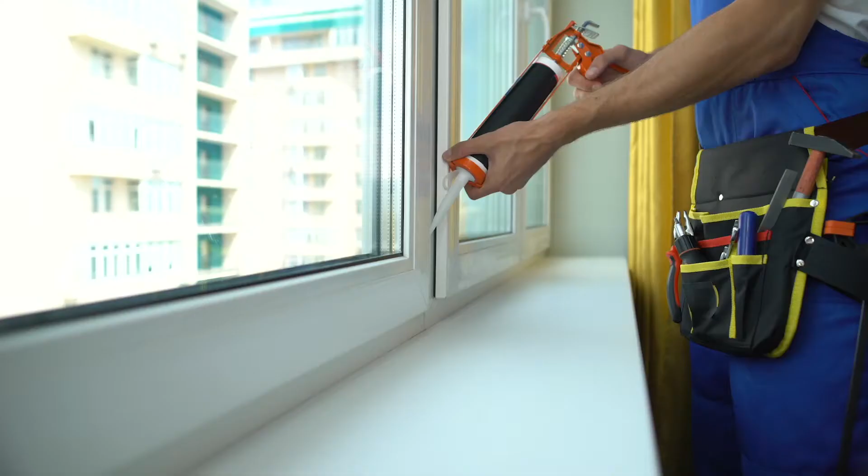I'm Peter Yost of BuildingWright, and today I will show you real-world examples and specifics in how the new code draws relationships between moisture management, air sealing, and insulation. I will talk about other ways to assess air leakage, some specialized air sealing materials, and of course, that sticky stuff.

When air leaks into or out of a building, there is a double penalty: the energy inefficiency of conditioned air being lost, as well as the moisture moving with that leaking air. If that leaking air hits a cold surface inside our walls or roof, the resulting water is likely hidden, creating problems we can't even see. And air leakage is really sneaky. It takes true attention to detail to beat it.

The code has a new focus on air tightness. We have new materials and tools to better manage air leakage as well. We have new materials such as liquid flashing. Infrared cameras reveal patterns of heat loss, such as in this image of a timber frame cathedral ceiling. The streaking or blurring is not a poorly focused image, but reveals the air leakage in the roof assembly.

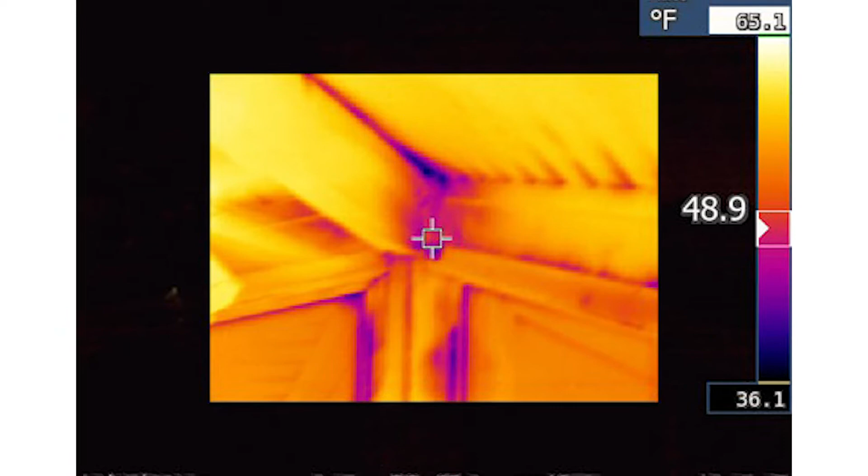And perhaps most importantly for air leakage, the blower door measures the air tightness of a home, a test that the new code now requires. When we air seal a building, we need to connect a whole bunch of different materials together to get continuity. You can see that this idea of continuity is built right into the code, starting with the definition of air barrier. Remember, we are using the terms barrier and control layers interchangeably.

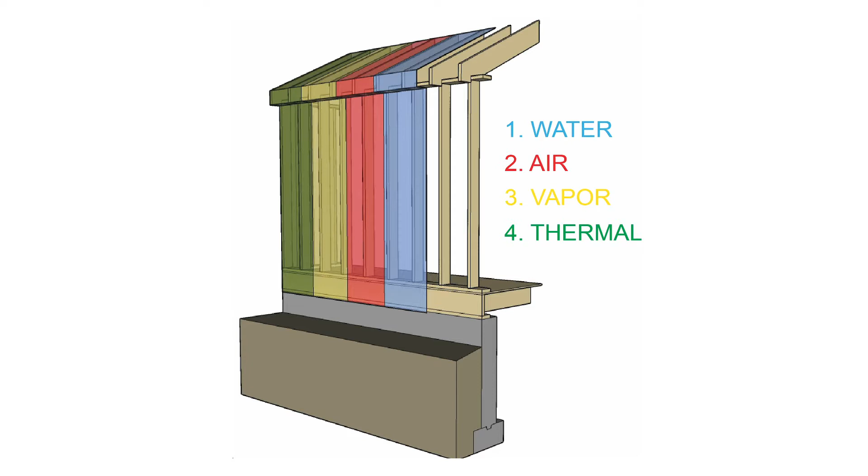We are going to need real focus to connect all the materials to get the building airtight. This image is conceptual and does not show the details of each layer, but it represents how we need to think of control layers as continuous and prioritized, with air being number 2.

The building code does not actually define what air impermeable means, except in its definition of air impermeable insulation. Air impermeable insulation is defined as having air permeance less than or equal to 1/50th of a liter of air getting through 1 square meter of material in 1 second at a pressure of 75 pascals, which is about the same as a 35 mile per hour wind. Well, that's a complicated expression, but it means air tightness is pretty tight.

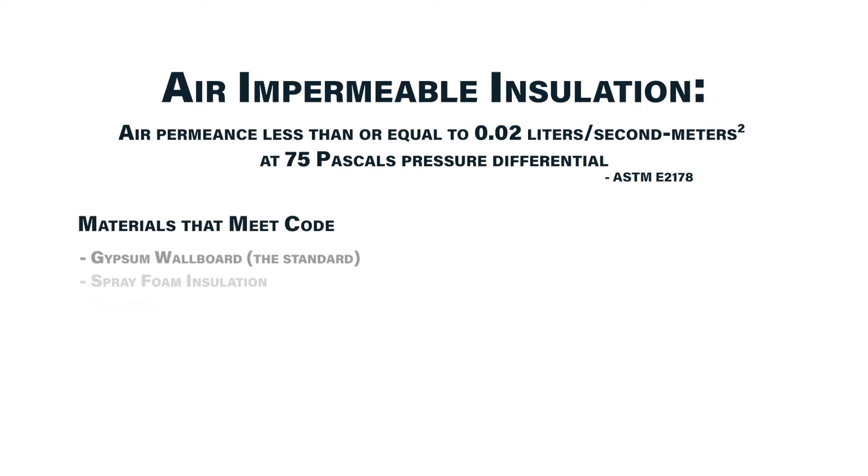But it really means that you can't start your air control layer with a field material that does not meet this ASTM standard, as determined by a third-party independent certified lab. All the materials on the left qualify as air impermeable, starting with drywall, the actual material they chose as the threshold material. Most building professionals are surprised to see that cellulose insulation is not considered air impermeable.

It does not mean that cellulose is not significantly more airtight than fiberglass. Cellulose is many more times airtight than fiberglass insulation. It's just that cellulose by itself is not nearly airtight enough to count as your field air sealing material.

One way to think about this idea of continuity is the pen test. You take your finger or your cursor or a pencil, and without lifting it off the page, trace the control layer from the footing to the ridge in a building cross-section. It's going to be really tempting to jump at changes in assembly, changes in materials, changes in plane. More on this later. Yes, that air leakage can be sneaky.

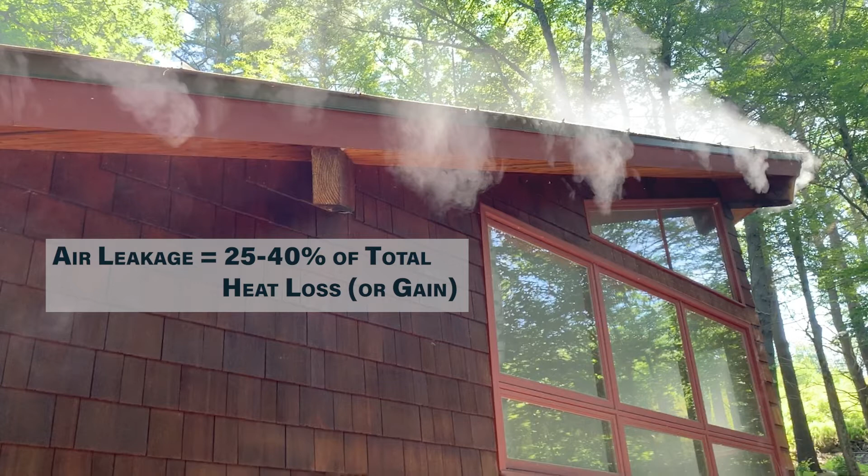This home had a ceiling roof moisture problem even after the roof was re-insulated and air sealed. Using a blower door to pressurize the house along with a theatrical fogger, you can see the air leakage at the ridge around the ridge beam that extends from inside to outside the building, as well as at the V-groove deck boards, also moving from inside to outside the building. This just goes to show that if you don't do it right the first time, it can be really challenging to address later.

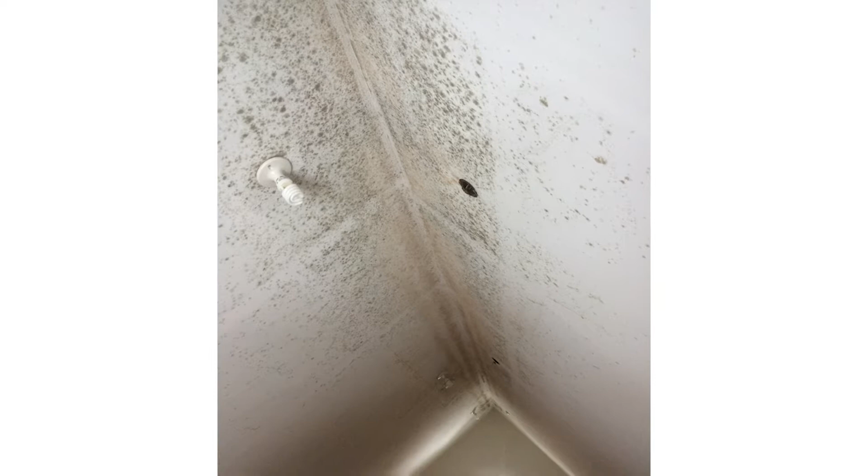Sometimes the air leakage moisture problem is obvious and unhidden, like in this picture of a finished attic. But it turns out that this is in a co-housing community, so there are about 30 very similar finished attics, some looking perfectly fine. Could the problem be hidden behind the drywall?

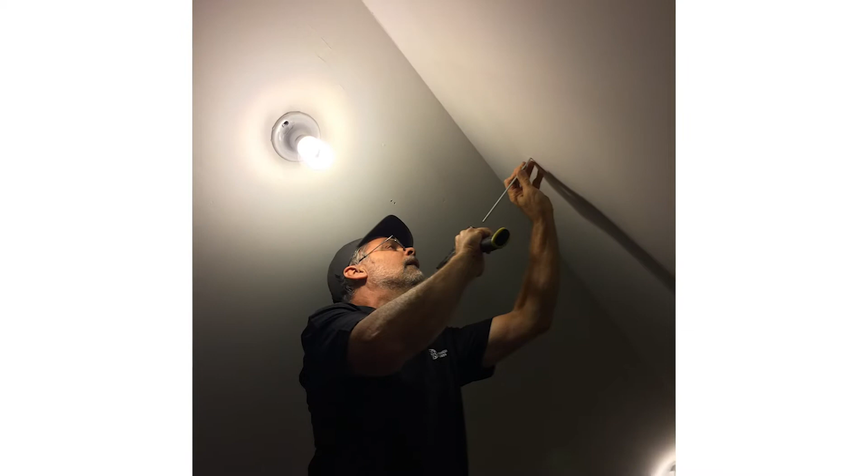To find out, I used long pins to penetrate all the way to the underside of the roof sheathing. I connected the pins to my moisture meter to measure the moisture content of the roof sheathing, leaving only 2 tiny holes to patch. Here is the moisture reading with the pins pushed all the way up to and slightly into the underside of the roof sheathing. Whoa, moisture content of nearly 40%. That is literally wet.

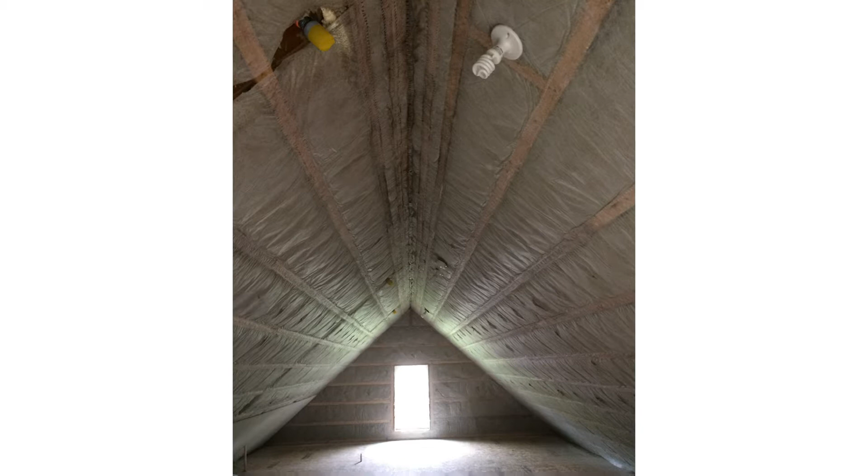So we tore down the drywall to find mold on the upper 1x3 strapping. When we took down the strapping and the cavity insulation, we found plenty of moisture staining near the top of the rafters and up to the ridge. We luckily caught all this before there was any structural damage to the roof framing or sheathing.

The source of this hidden moisture? Air leakage at every ceiling penetration that wasn't sealed, mostly fire sprinkler heads and light fixtures. So sometimes the moisture problem can be seen, but more often than not, air leakage results in hidden moisture damage. Sometimes we're not so lucky.

The air leakage and subsequent hidden condensation here has just started to rot out the top of the lower gambrel steep pitch and also the rafter for the top pitch just above that. This had to be repaired with structural plywood gussets to support the pitch change joint. This home was about 4 years old.

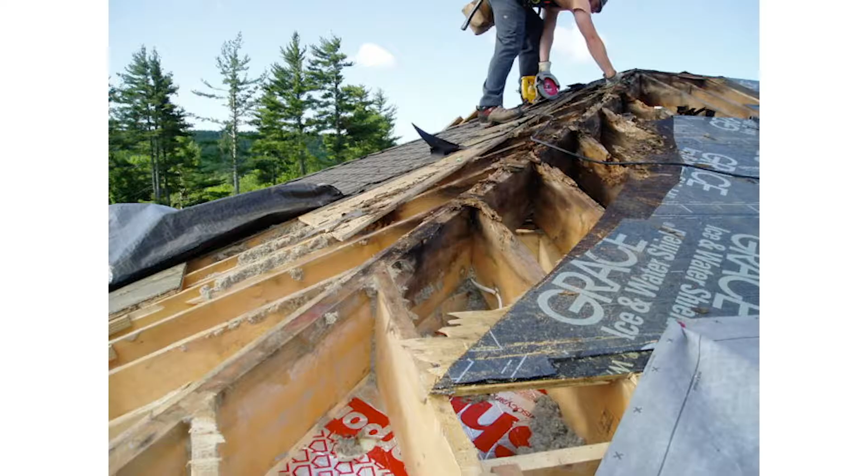Here is an unvented hip roof with air leakage trouble. The rotted roof sheathing required complete replacement. With the support of a structural engineer, we were able to repair the top half of the hip rafter and the ends of the rafters at the hip. This house was about 10 years old. The thing is, both these homes were built after 1990 and were considered tight homes. Even seemingly small air leaks can cause big trouble.

So, where do we locate your continuous air control layer? You have three options, of course: continuous on the interior, in the framing cavity, or on the exterior. The most common approach on the interior is usually referred to as the airtight drywall approach, or ADA. You seal the margins of each drywall panel and margins of any penetrations or cutouts to each panel with a sealant or caulk. The sealant bead must be continuous to get a complete air seal.

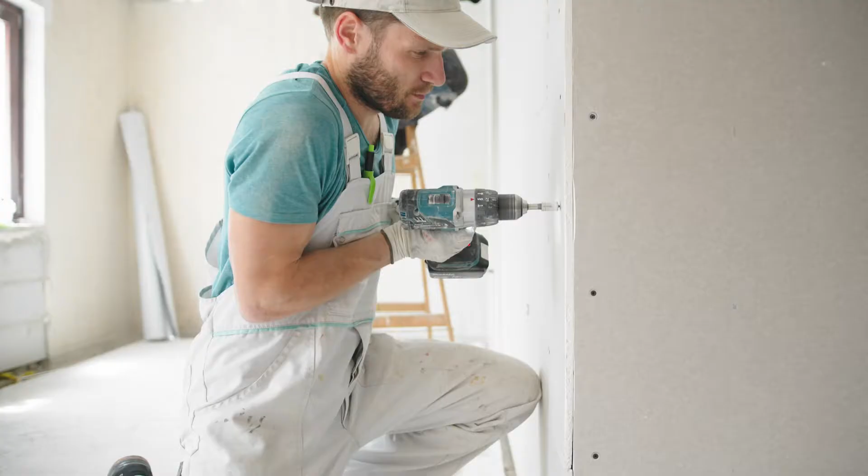In the airtight drywall approach, or ADA, the continuous air seal material behind the drywall could be a gasket. But note that whenever you use the ADA, you might be counting on your drywall trade to get the air seal continuous. There will be some training and quality control required no matter who hangs your drywall with the ADA system.

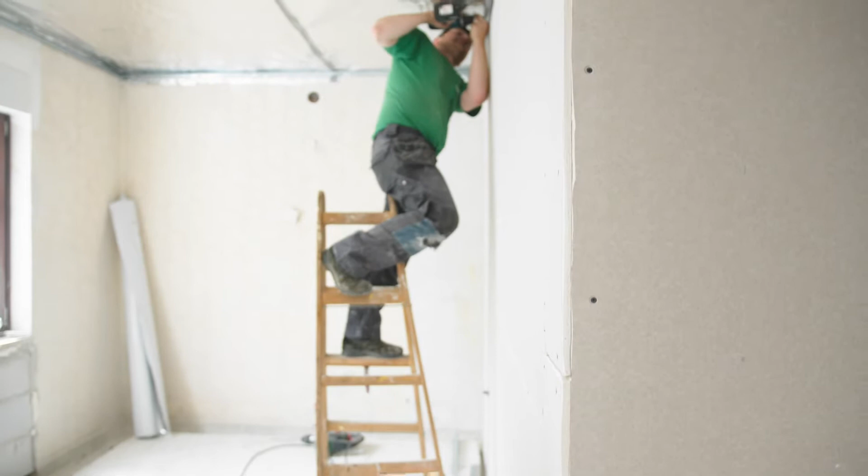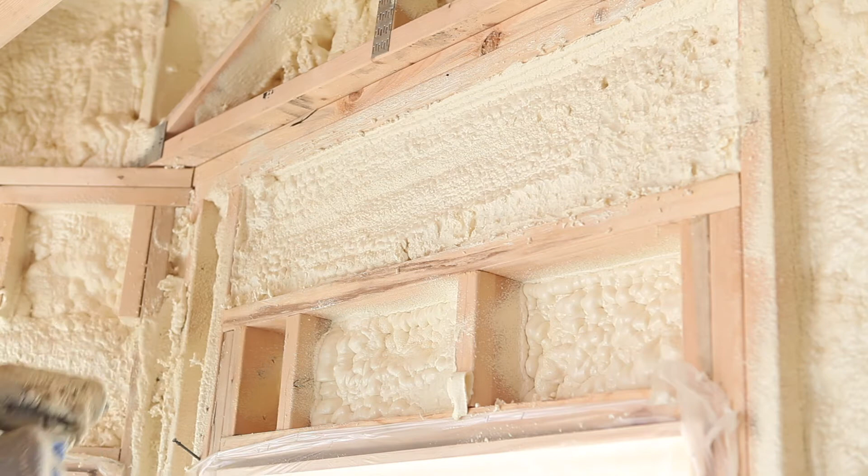Next up is to get your air seal in your framing cavity, almost always with some sort of air impermeable spray foam insulation, acting as both your air seal and your insulation. We will be talking about spray foam later in this video and again in the insulation video, but in any case, if spray foam insulation is to be counted on for a continuous air control layer, care must be taken to individually air seal any place where air can leak that is not in the framing cavity, like between double top plates.

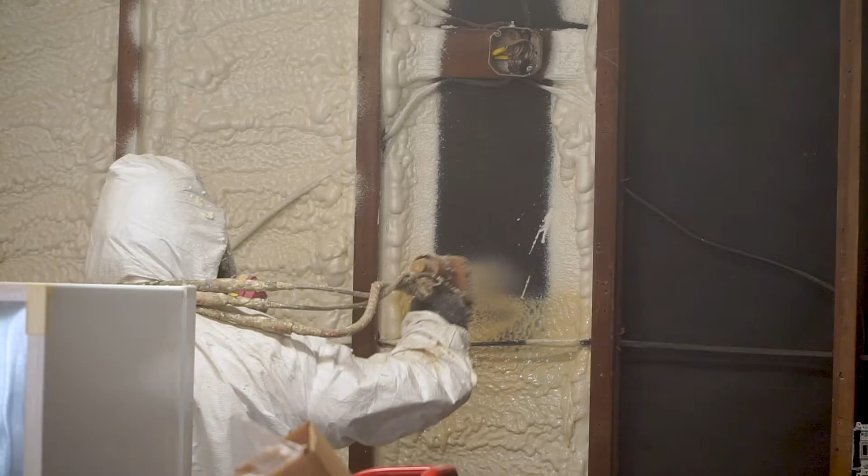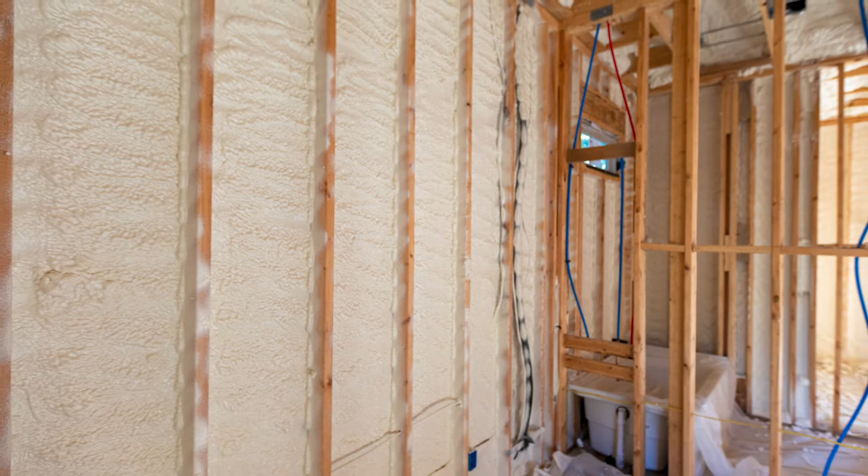Here is open cell spray foam as both cavity fill insulation and air control layer in a foundation wall. Here is closed cell spray foam in a roof assembly and closed cell spray foam in a wall cavity. Now note that the two closed cell spray foam applications do not fill the framing cavity. These cavities have been flashed with the spray foam as the air control layer, but the full complement of insulation will be completed with an air permeable cavity insulation. We will come back to this flash and fill or flash and batt approach in the next section on insulation.

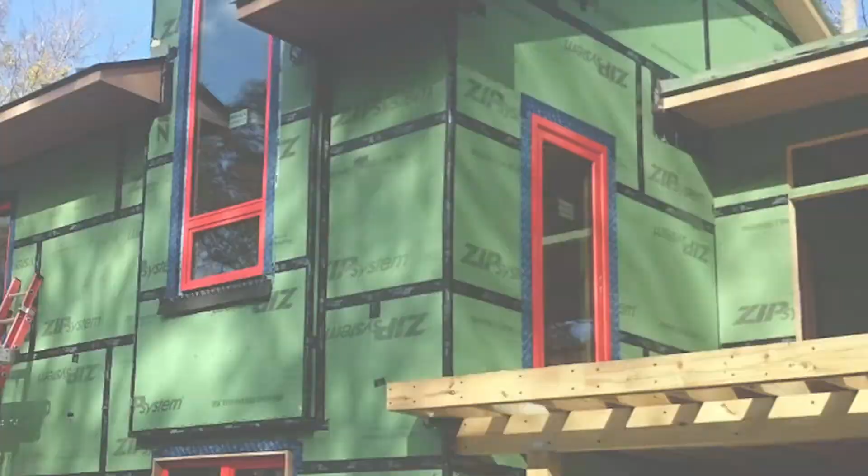The final option for the location of the air control layer is the exterior. The air control layer can be the sheathing or a flexible sheet good like house wrap, or even liquid applied membrane, either applied to the exterior sheathing. One example of sheathing as the air control layer is the Huber ZIP System, where the tape completes the air control layer because the sheathing panel meets the air impermeable code standard. A major advantage of a continuous exterior air control layer is the lack of interfering assemblies, like floor systems and interior partitions.

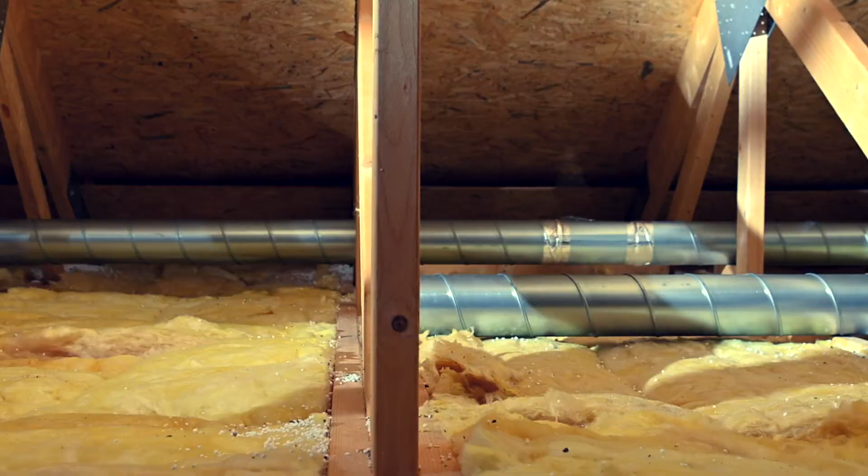But wait, why a photo showing gypsum wallboard as part of an exterior air control layer? Well, if your attic is vented and your insulation is at the ceiling plane, then that is where the air control layer has to be, at the ceiling. So while the drywall is definitely inside the building in terms of bulk water management, the attic is technically outside of conditioned space or where the air control layer is.

Now, the cool thing about how they drywalled this top floor ceiling is that they came and drywalled this ceiling separately and before any other drywall work was done, and before any top floor interior partitions were framed and installed. That means the air control layer at this ceiling is really continuous. No penetrations or cutting around interior framing. Sometimes better performance requires thinking outside the box a bit.

While the field of any exterior wall is pretty easy to get airtight, there are a lot of tough spots. I'm reusing the ZIP System image because it reveals one of the top tough spots.

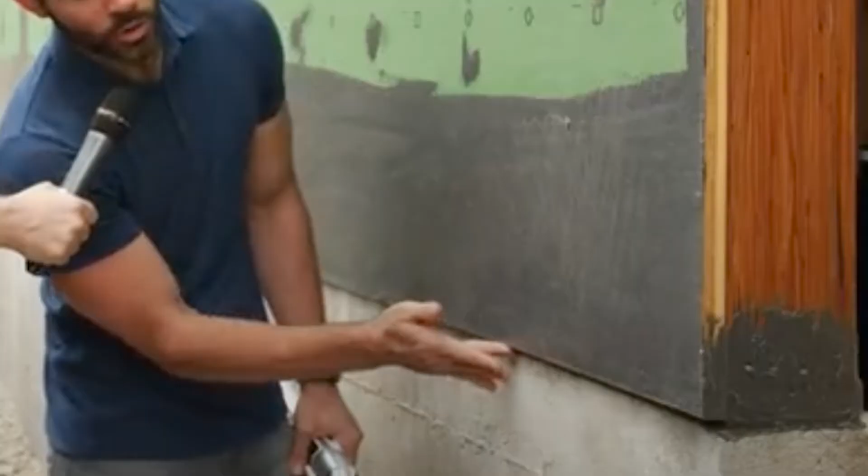Where the exterior sheathing at the bottom of the above grade framed wall meets the top of the below grade foundation wall. One way to handle this transition area is to seal it with a proprietary sealant designed specifically as part of the wall sheathing system. This detail completes the continuity of the air control layer at the above grade wall to foundation wall transition.

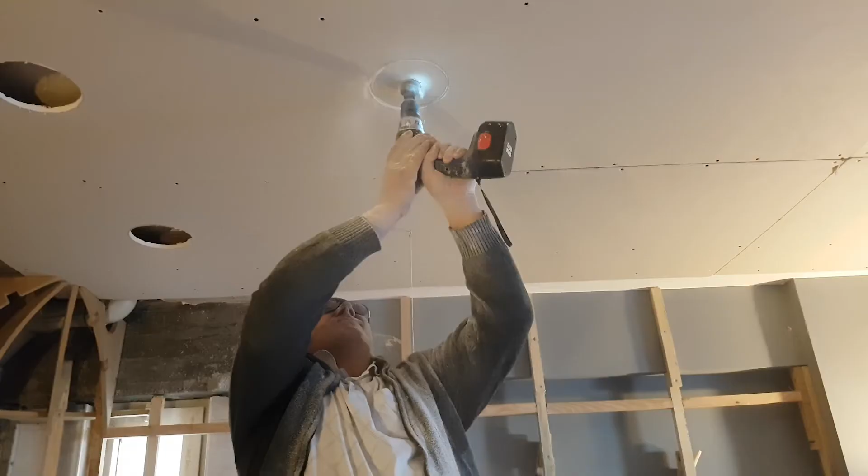Now, it's really pretty simple. If you make a hole in an exterior wall or any part of the building envelope, you own it and you need to seal it. Make sure your scope of work for each trade that makes holes in your building envelope has clear responsibility for sealing every hole. There are manufactured gasket products that can be configured for pretty much any size penetration, and then there are air sealing materials that site seal penetrations.

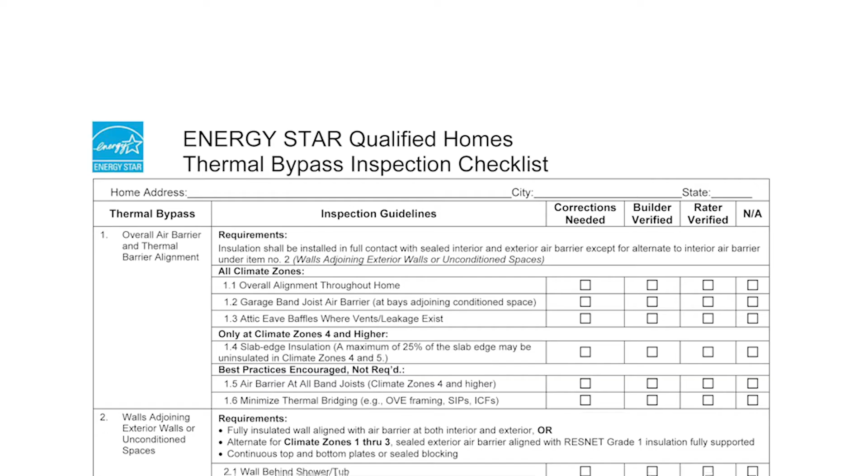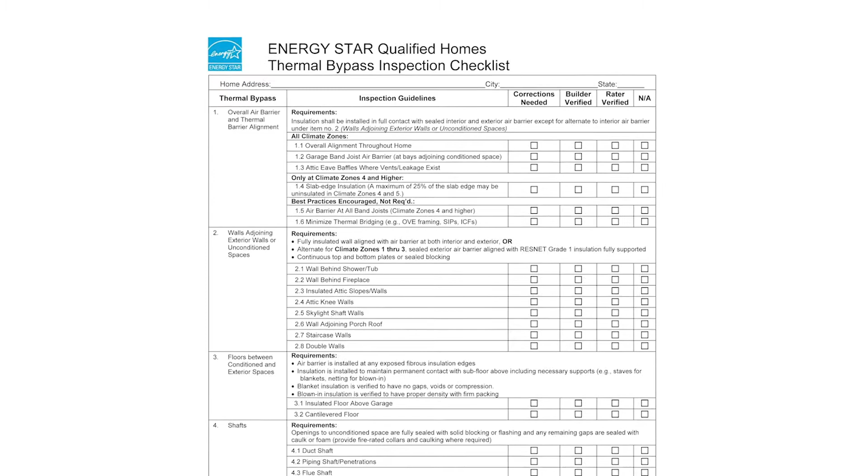The building code, section R402.4, has a mandatory list of places to air seal, but wouldn't it be nice to have a checklist? In fact, we do. Some time ago, the EPA Energy Star program gathered a bunch of leading home energy auditors, and they spent considerable time and effort coming up with about 24 of the most common thermal bypasses, places in the home that tend to not get either air sealed or insulated. Now, if you use this checklist, you're well on your way to covering the list in the code, as well as meeting the air tightness code requirement.

You can see that there are 6 categories in the checklist, with the first one being overall air barrier and thermal barrier alignment. More on this topic in the video on insulation. Note that some elements are dependent on climate, like under number 1, and for every item there are checkboxes for corrections needed and checkboxes for builder or rater verified. It's a list that has stood the test of time in our industry.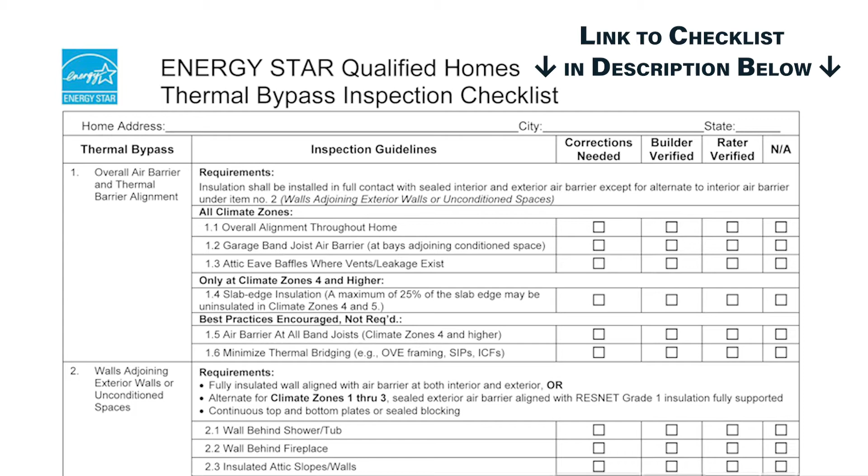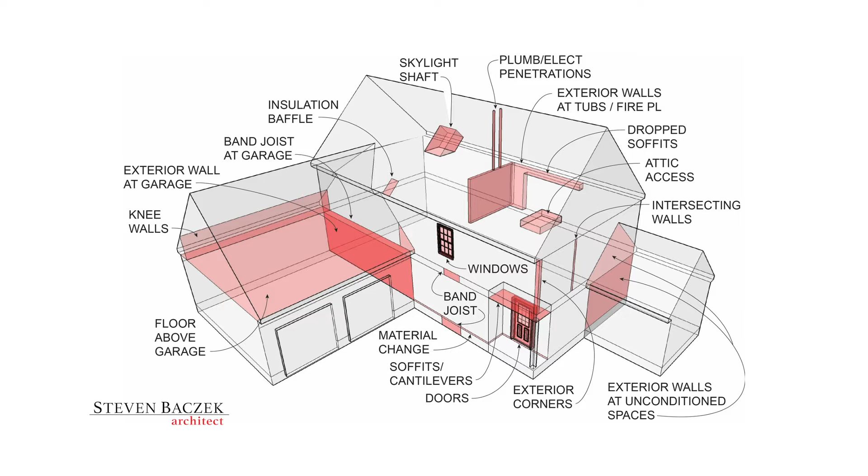But my good friend and architect Steve Baczek, he just hates checklists. After all, he is an architect. So Steve took the checklist and turned it into a drawing. That's what architects do. If you work your way through this drawing, you will be well on your way to understanding comprehensive air tightness in your homes. In a way, Steve has translated the pencil test into a 3D expression, at least for the most common jumps in a pretty typical home.

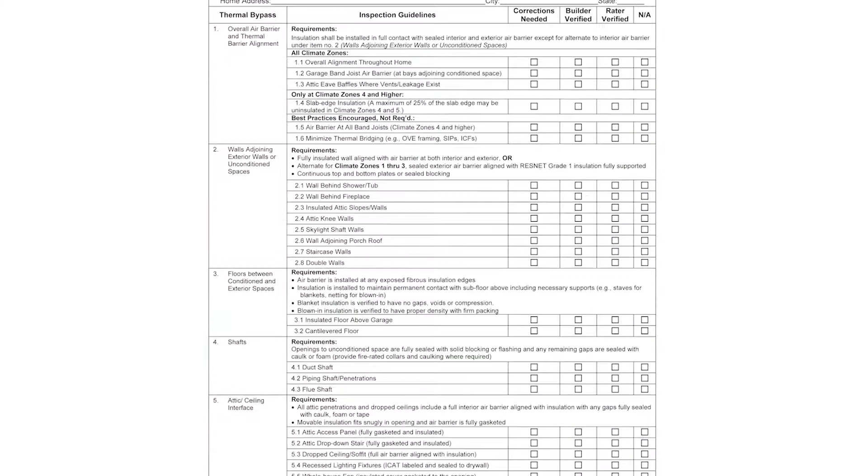I think one of the trickiest and most common thermal bypasses is exterior walls behind tubs. That's 2.1 on the checklist. But frankly, all of these can be challenging. My cut on the checklist versus the drawing, I think we need both. Now note that for windows, Steve just colored in the whole thing as a thermal bypass. There are 2 ways that windows can leak air. The first is the window unit itself.

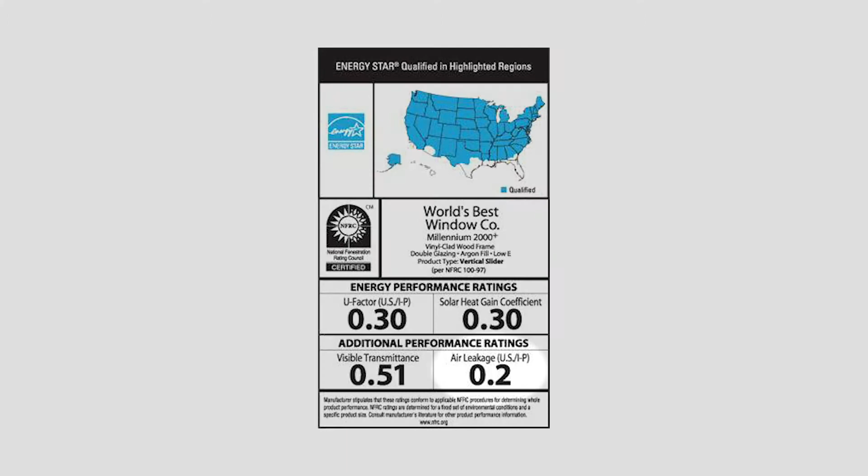These 2 window labels are on pretty much all windows these days because almost all window manufacturers submit their window units for modeling analysis and testing by the National Fenestration Rating Council, the NFRC. We will talk through some of the other NFRC ratings, but for now, let's focus on the AL or air leakage number. For the left-hand sticker, the AL number is 0.2 cubic feet per minute per square foot of window area. Is that good or bad window air leakage? Well, the 2018 code requires that all windows be no more than 0.3 cubic feet per minute per square foot. So 0.2 seems pretty good, and it will certainly meet the code.

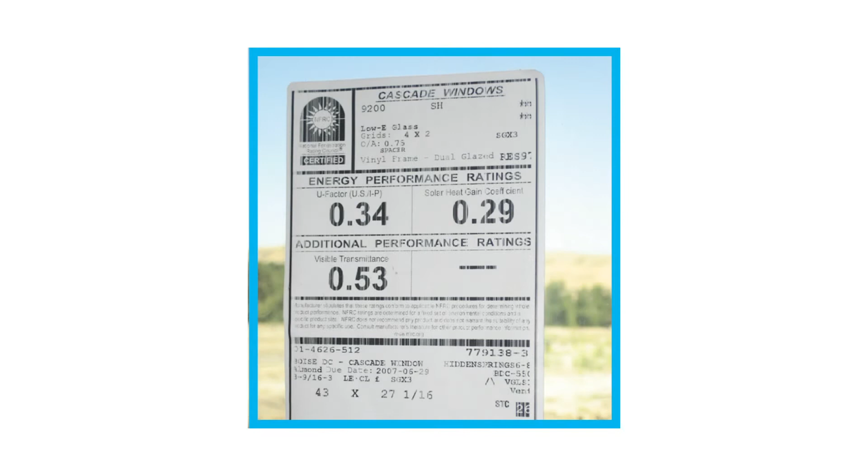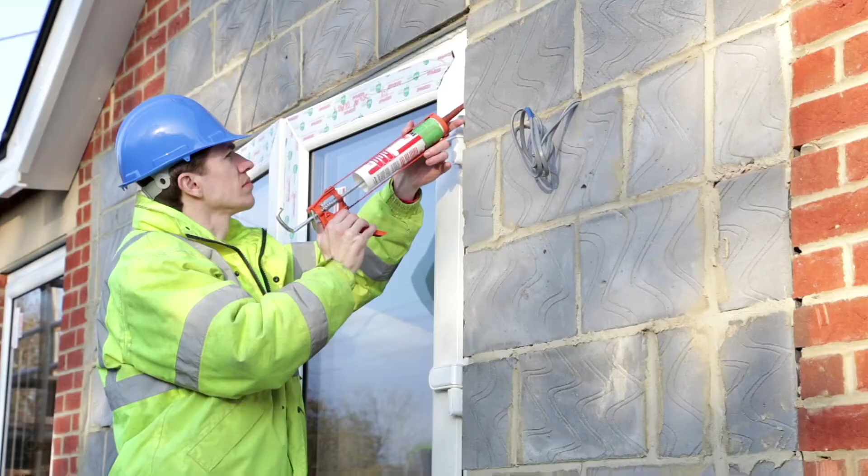But what about the NFRC window sticker on the right? In the box where the AL number should be, there's just a dash. It turns out that while the code requires you know and be able to prove the air leakage of your windows, this particular rating is optional for the NFRC window label. So where does that leave you as a builder or architect? You either need to use windows that report their AL number on the NFRC sticker, or your building inspector, per the code, has the right to make you prove the AL number for all your windows. Usually this means you need to contact your window rep or window manufacturer and go through the hassle of getting third-party certification of your window air leakage.

And in terms of bulk water management, since any water that leaks is likely by gravity to end up at the sill rough opening, the drained rough opening is arguably the most important part of the water control layer at this penetration. But second, how do we air seal at the sill without clogging up draining at the sill? We complete the window rough opening air seal at the sill by moving it back all the way to the back dam.

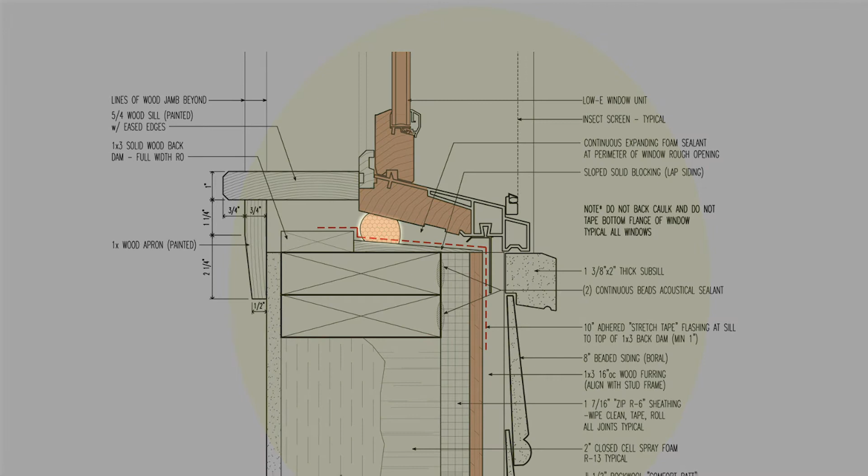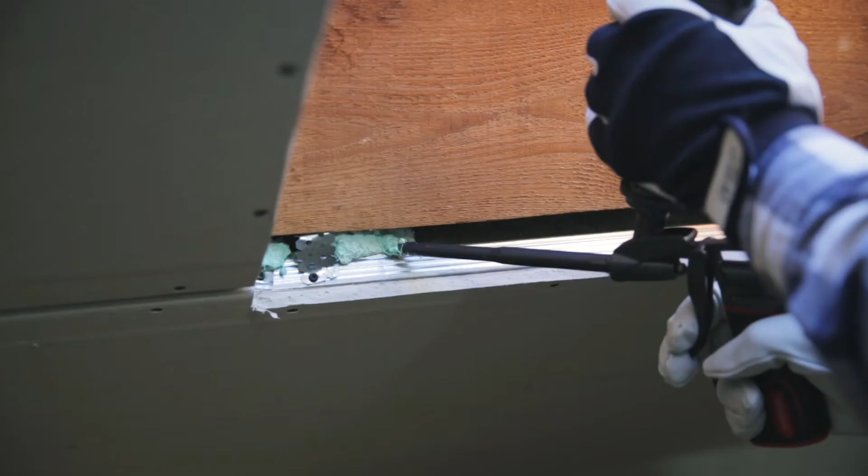This often means that sequentially, we are air sealing around the window rough opening completely after the window installation and flashing have been completed. There is an easy space for air sealing between the rough opening and the window unit at the head and jambs. But what about at the sill? The sill air sealing component can't run between the rough opening and the window at the sill.

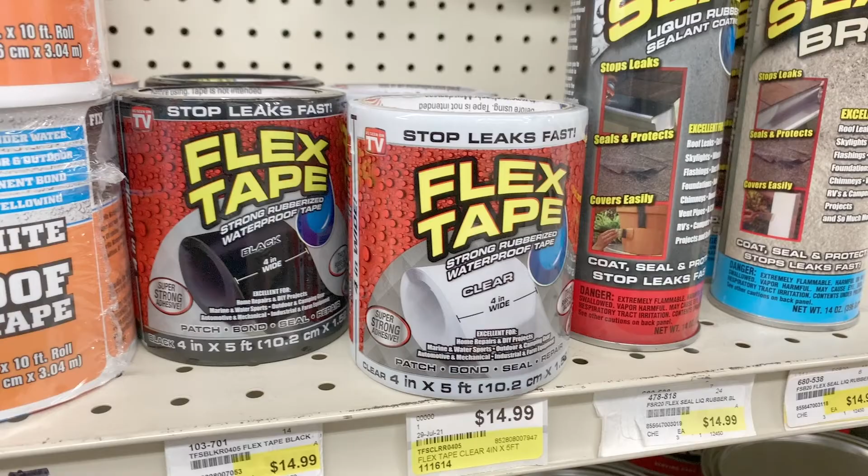So the sill air sealing, most often a bead of sealant or foam, simply needs to connect at each end to the air seal at the jambs. By the way, a pressure-sensitive adhesive or PSA tape can be used here as well. More on choice of air sealing materials a bit later.

The air seal at the sill is just as important as the air seal at the jambs and head. It's just that the sill air seal has to play nice with the sill bulk water drainage. Again, the intersection of air sealing and water management. It's always good to get solid resources from any training, so here is a go-to resource: Building Science Corporation's Enclosures That Work. In terms of field tested and practical, it doesn't get any better than this.

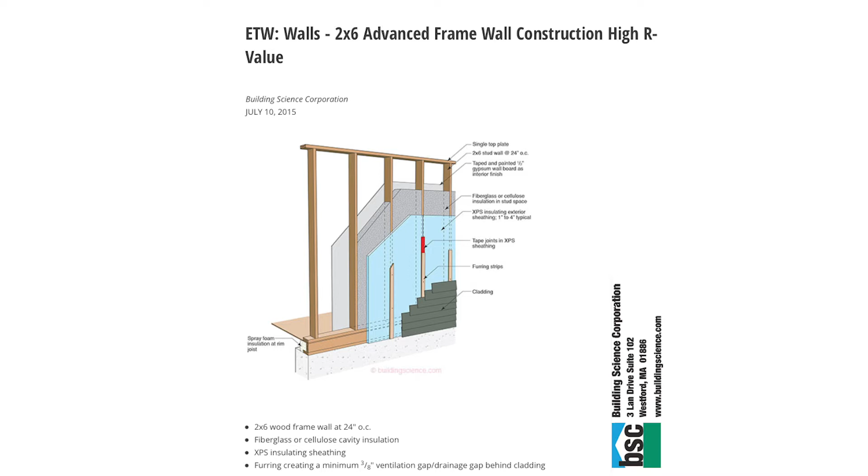So where is the air control layer in this enclosure? It's exterior, with the main components being the XPS or extruded polystyrene sheathing and the PSA tape at the XPS panel joints. Note how the 4x8 sheets of XPS are run vertically so that the full length of the sheet is supported at the framing joint.

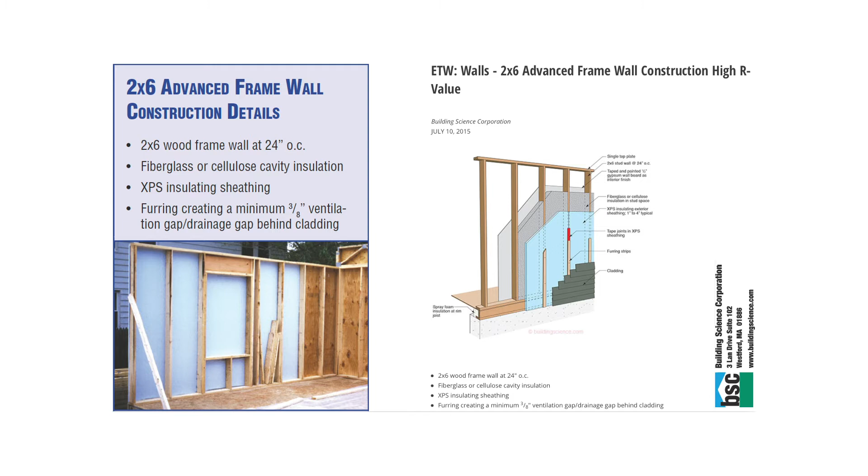A key to this assembly is what PSA tape to use on the XPS sheathing. Material compatibility is a big part of air control layer continuity, so either use the tape recommended or required by the XPS manufacturer, or field test your choice of PSA tape to make sure it bonds well to the rigid insulation. And just a little side note here, yes, this assembly would definitely require the addition of structural sheathing interior to the XPS sheathing or some shear bracing system in place of the structural sheathing.

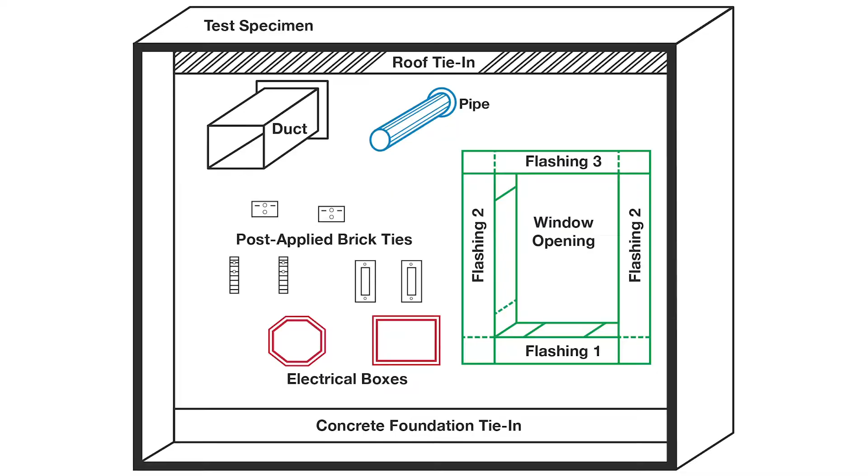Remember that while air control layers start with the right or required air tightness of individual materials, it's really when you put them all together in an air control layer system that you get performance. The Air Barrier Association of America uses the American Society for Testing and Materials, ASTM. It uses their standard E2357 for the wall assembly as shown in this image, with a set of standard penetrations.

These standard penetrations capture many of the tough spots for air sealing. And you can see there's a duct, there's a pipe, there's a window penetration. These are all typical but standardized in this test. Every wall building assembly tested is set up exactly the same way.

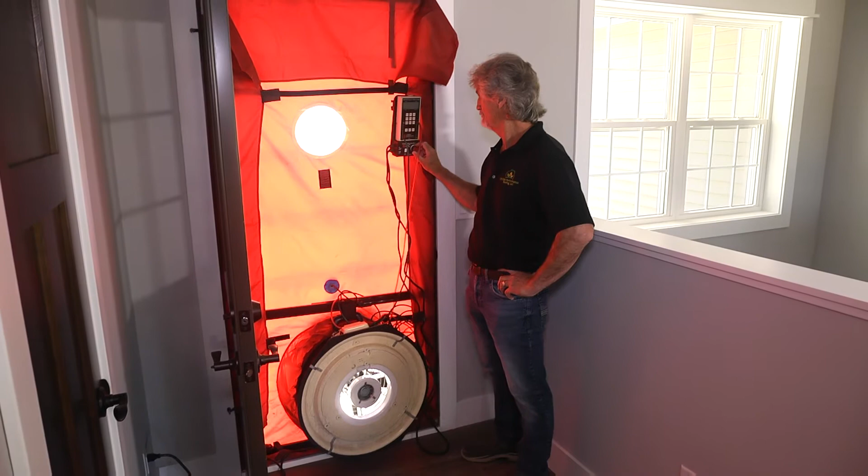A major new part of the code related to air leakage is the requirement for a blower door test. So let's start this discussion with just what a blower door test is. You close all exterior doors and windows and open all interior doors, including the basement door, if there is one. And if, of course, the basement is conditioned space. That means inside the location of the air and thermal control layers.

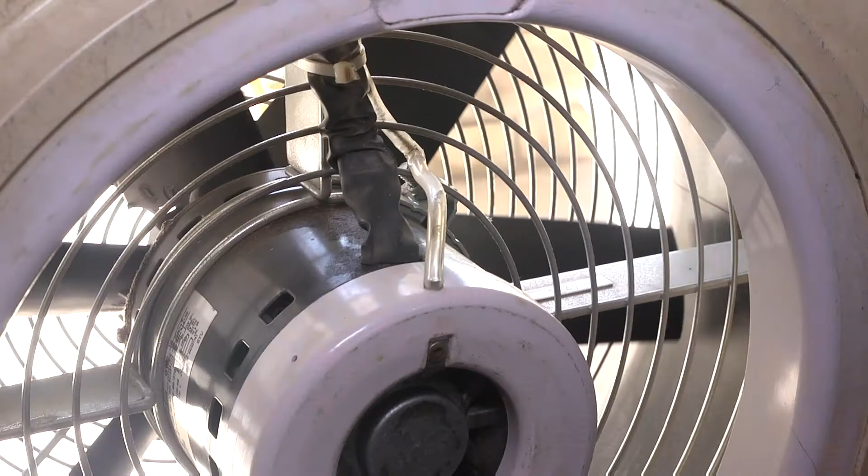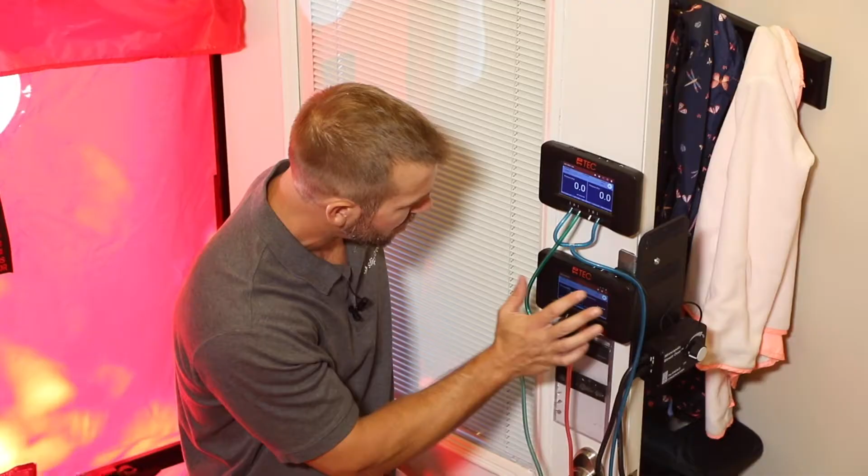The blower door creates a pressure difference of 50 pascals, about the same as a wind blowing 20 miles per hour, but equally from every direction on the building. Now, just a note, while you can run the blower door turned around to pressurize the building, that can be more difficult because closures on bath and kitchen exhaust ducts are pulled tight when you depressurize the home, but not so if you pressurize. The code does not explicitly state which test to use, but just about everyone runs a depressurization blower door test.

The blower door test is affected by wind, so if it's really blowing, particularly gusting, you might have to wait or reschedule, but the blower door system can accommodate some wind. The test itself takes only a few minutes, but setup can take at least a half an hour. The blower door system measures both the pressure difference of 50 pascals as well as the airflow through the blower door in cubic feet per minute. That number, the CFM50, cubic feet per minute at 50 pascals, along with the house volume, allows calculation of the ACH50.

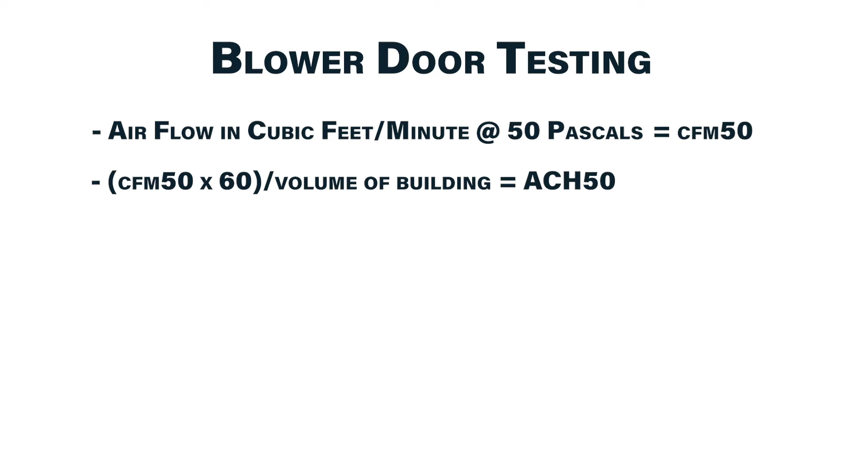That's the number of air changes per hour at 50 pascals. That's the number required by the code. If you meet or exceed the required performance of 3 ACH 50, you're good to go. If you don't, you will need to go around inside of the building and identify areas of leakage to correct and improve your ACH 50. So this is a performance test.

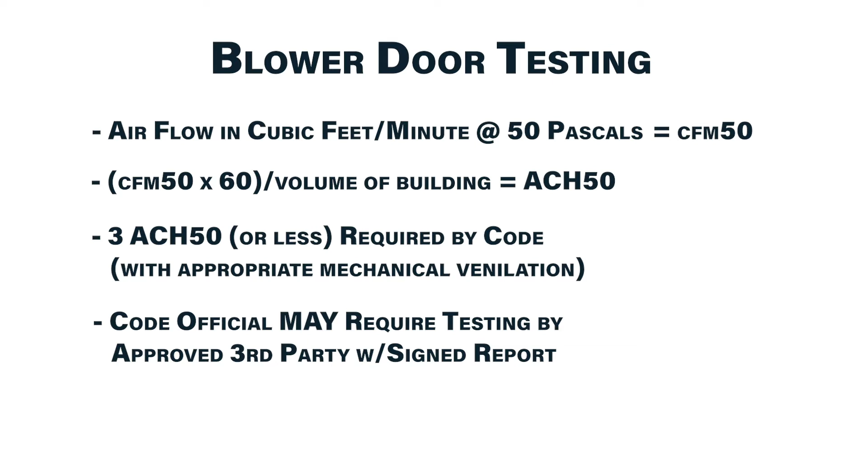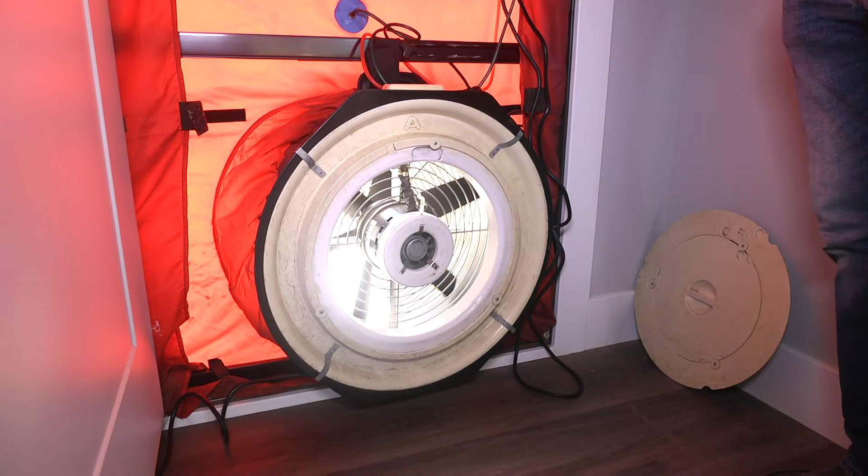Now, I speak from personal experience. The first time I performed a blower door test in my own home, where I had done all the air sealing work myself, I was so angry because of all the places I missed. Now, granted, for me, it was an existing older home and leaks were everywhere, but the point is, be prepared your first time around to be disappointed and need to go around your building and learn.

How hard is it to get to 3 ACH 50 or lower per the code? Well, the average new home in the US is about 5 to 7 ACH 50, so it requires diligence, but not craziness. It won't take you long to use this training and figure out how to consistently deliver 3 ACH 50 or lower.

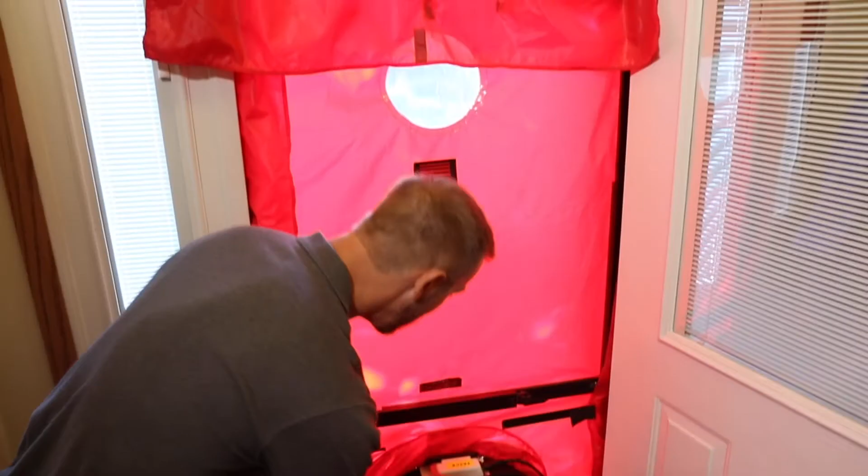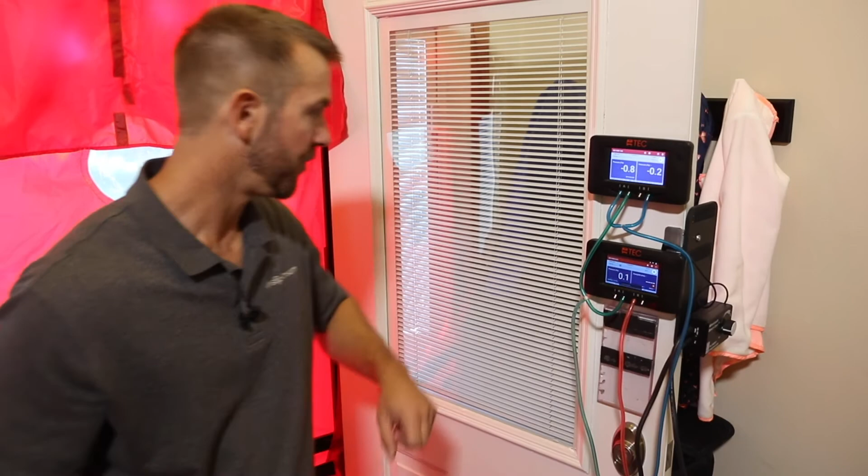The building code does not explicitly state just what blower door systems are acceptable or not, but the code references standards that require certain levels of accuracy for the blower door fan and pressure gauge, and that this equipment be calibrated per the manufacturer requirements. Now that said, there are 2 primary blower door kit manufacturers.

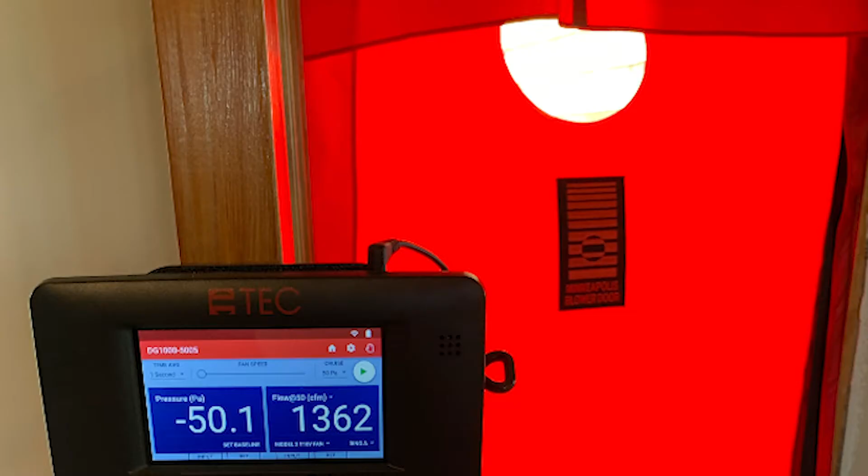Here you see me with my Retrotec blower door kit. The shroud is fit to the door by the cammed door frame. The fan sits in the shroud and door frame, and the fan is connected by tubing to the digital pressure gauge. Here is my Minneapolis blower door kit from the Energy Conservatory, showing the pressure gauge mounted to the edge of the door. Both blower door kits are code-worthy.

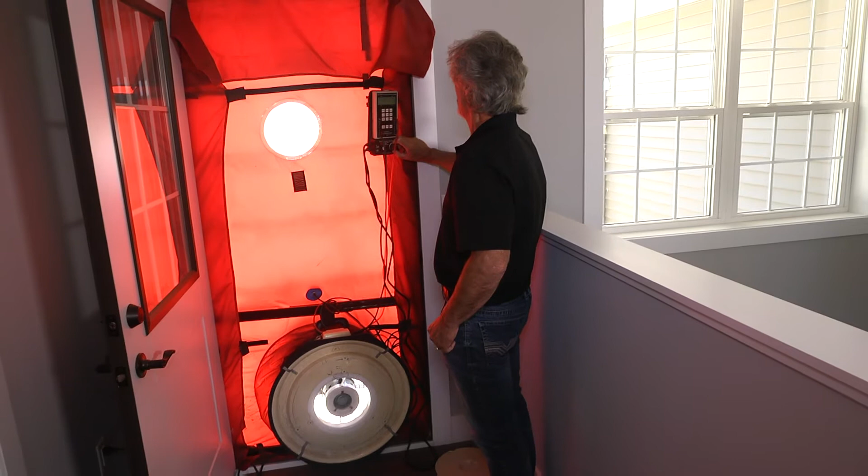The blower door test is really pretty simple, but the equipment is quite sophisticated. Both the blower door fan and pressure gauge need to be handled with care, but they are field equipment, so they're robust and long-lasting if treated like any other expensive tool on your job site.

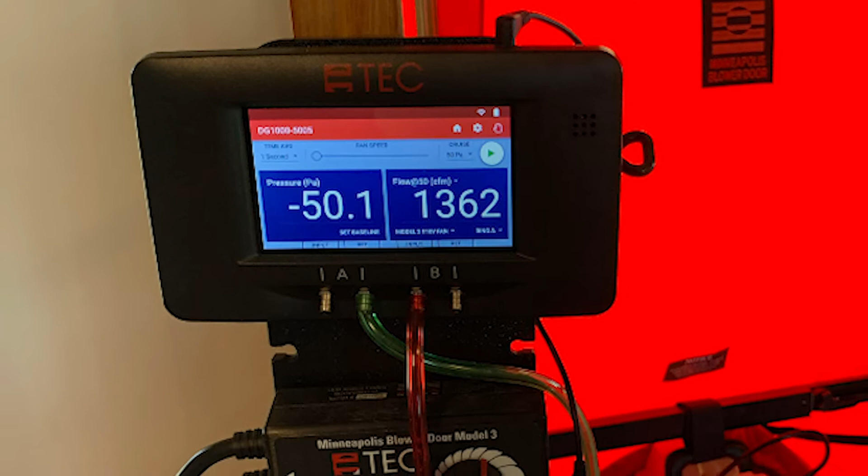You can read the blower door gauge. It says minus 50.1 pascals of pressure, and the flow through the fan is 1,362 cubic feet per minute. When I measured the home's volume and calculated the ACH 50, I got 1.2. This was a new home, timber framed, with a panel package that wrapped the entire timber frame. 1.2 ACH 50 is well below the required 3 ACH 50. This is a pretty tight home.

Note, though, that really airtight homes can be as low as 0.6 ACH 50. That happens to be the required air tightness for the Passive House program. That is 5 times tighter than required by the code. So as I said, 3 ACH 50 requires attention to detail, but if you follow the Energy Star thermal bypass checklist, you are well on your way to code compliance for air leakage.

Sometimes pictures are worth 1,000 words. I have found that to be the case with air leakage in buildings. It can be hard to convince either building owners or trade contractors that air leakage, completely invisible, is a big deal. So this infrared image was taken during the winter from the inside of the home, looking up at the timber frame ridge in the living room.

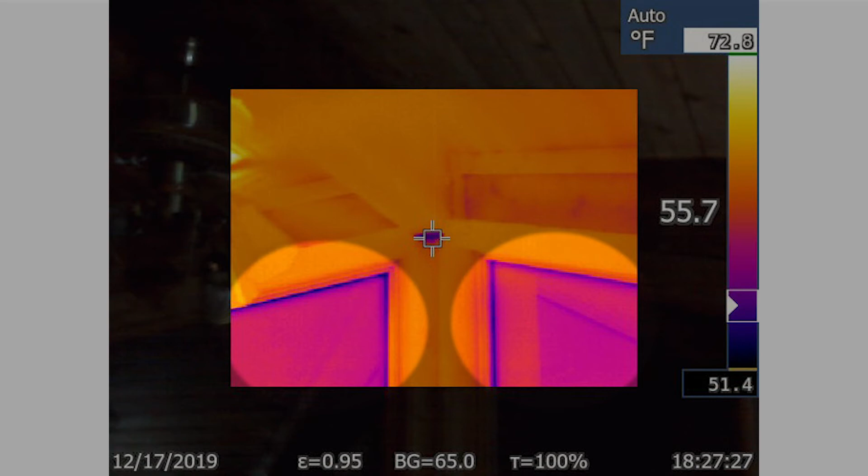Bright yellow represents the warmest color at a surface temperature of about 73 degrees Fahrenheit, and the coldest surface temperature at the edge of the windows, that's purple, is about 51 degrees Fahrenheit. Looks as though the timber frame roof is doing okay in terms of thermal bypasses like air leakage and thermal bridges.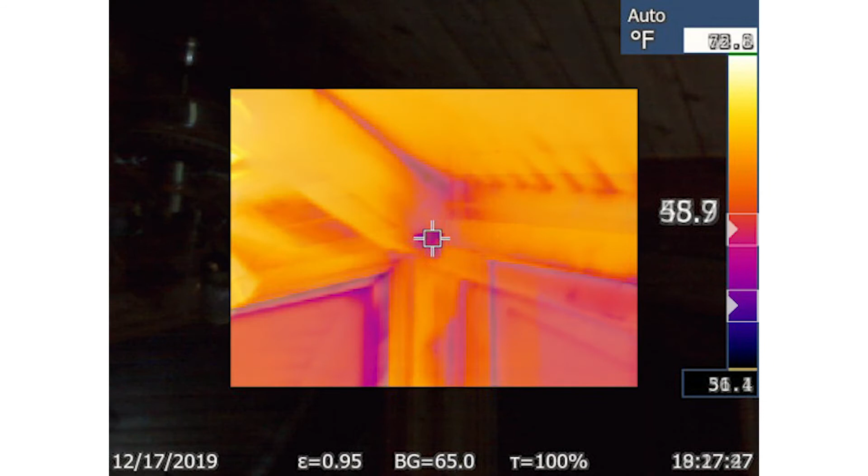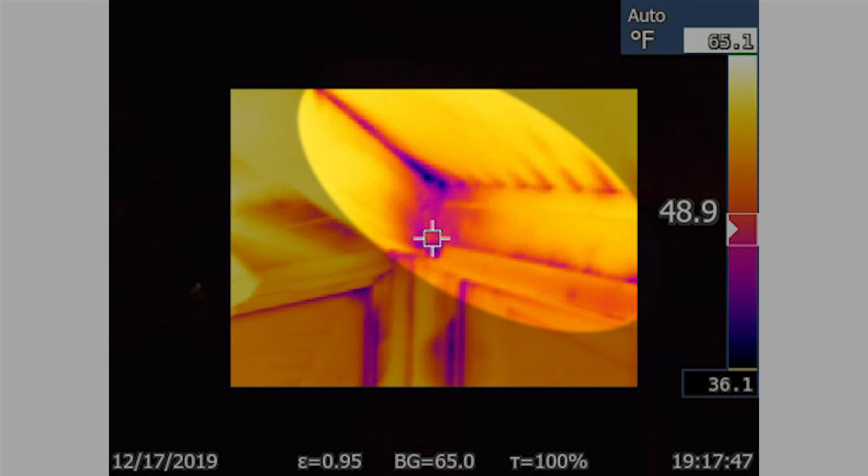But this next image was taken in the same home after I turned on the blower door and depressurized the home, pulling in cold outside air. All that streaking is air leakage that was completely hidden because without the blower door running, warm air was leaking out and the surfaces at the ridge were warmed by that leaking air. And without ladders or staging, you would not be able to feel that cold air leaking in with the blower door running, but adding the IR camera makes it easy to find those air leaks anywhere in the home.

Now, you don't need an infrared camera to figure out building performance, but it sure helps. There are big portions of the year, regardless of climate, where IR imaging is challenging because the temperature difference inside to out is not great enough to reveal air leakage locations and patterns with an infrared camera. So we flip the blower door around and pressurize the house while running a theatrical fogger inside. Yeah, there is more prep for this approach, but plenty to learn about air leakage this way.

Now, a note of caution. Disconnect or seal off all smoke detectors and make sure that either all of the neighbors or the local fire department know what you're up to. Theatrical fog's resemblance to smoke is simply a bit too close.

Just a quick couple of points about the sticky stuff we use to connect components of our air control layers. I wrote a 15-part blog series called Sticky Business. So for more detailed information on building industry sticky stuff, go to buildinggreen.com and search under the topic Sticky Business. But some key takeaways from that work.

There are two types of joints that liquid sealants can address. This first image is a planar joint with the sealant taking the shape of an hourglass and with backer rod in the joint below the sealant. The second image is a corner joint. The sealant bead goes into the corner after a bond break tape is installed in the corner as well.

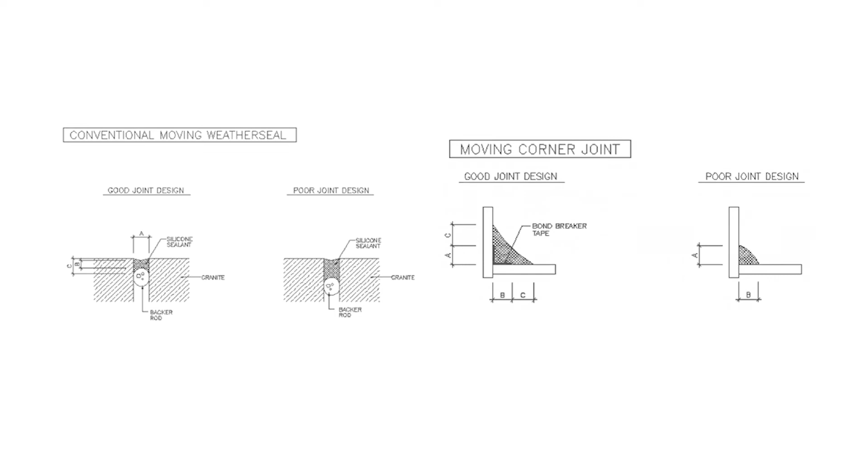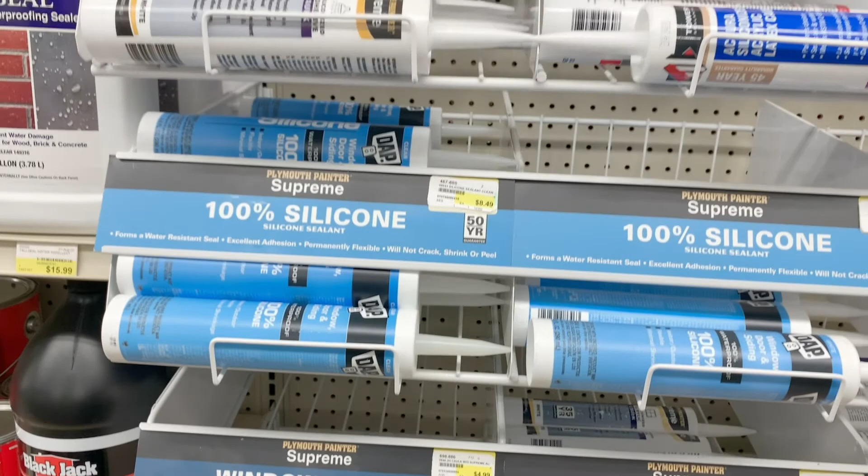So in both configurations, note how critical the joint and sealant performance is to the proper bond break at the back of the sealant. I don't think I ever used a bond break, such as backer rod or the backer tape, when I was a full-time builder remodeler. The other key mistake I regularly made about liquid sealants was simply buying the cheapest latex acrylic at the hardware store. There are a lot of different types of sealants, each with strengths for different applications, including material compatibility with the substrate. So we got to get the sticky stuff right.

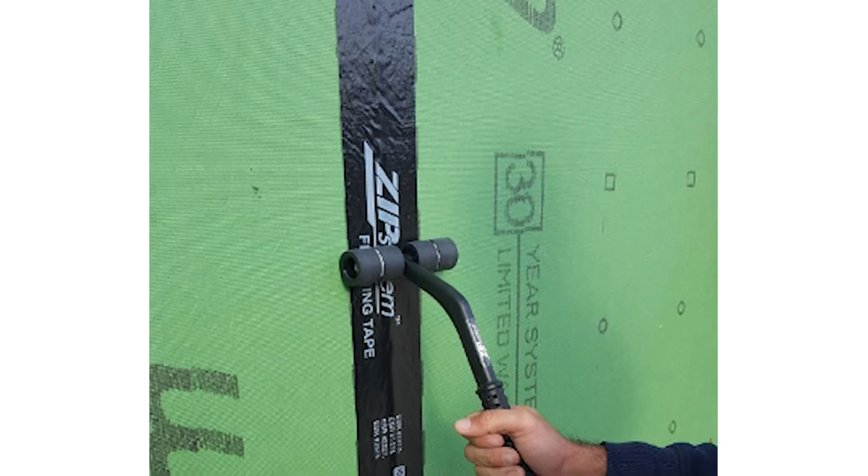More sticky business. All the construction adhesive tapes I know of are pressure sensitive or PSA tapes. They all only stick well if we use pressure. The pressure liquefies or wets the adhesive so it penetrates into the surface of the substrate. Without the pressure, the bond is much weaker and shorter lived. In my work with both liquid sealants and PSA tapes, I trust the tapes to handle contraction and expansion areas more reliably than sealants. It's just a personal preference. But again, for more detailed information about all ways to make connections with sticky stuff, go to the article I wrote on buildinggreen.com called Sticky Business, and you're on your way.

There are two special air sealing materials I wanted to discuss, the first being spray foam. The most important thing to point out about spray foam is that both open cell and closed cell spray foam qualify as air impermeable according to the code definition. So while there are significant differences between these two from an insulation perspective, they both can be a key component of your air control layer.

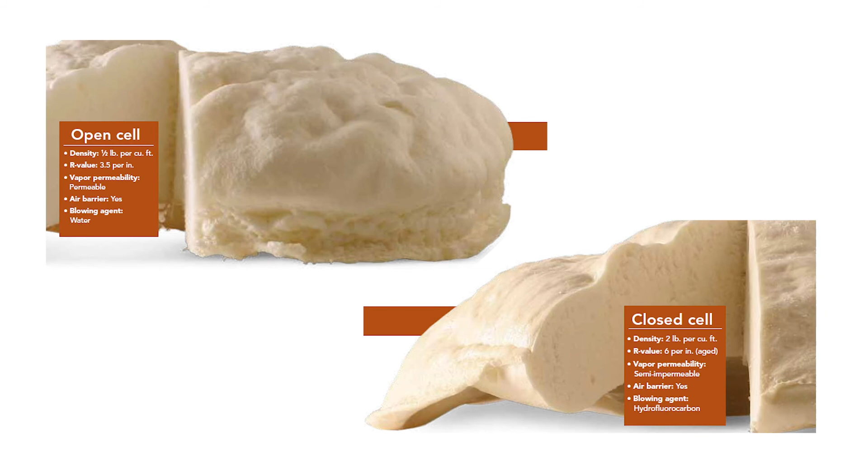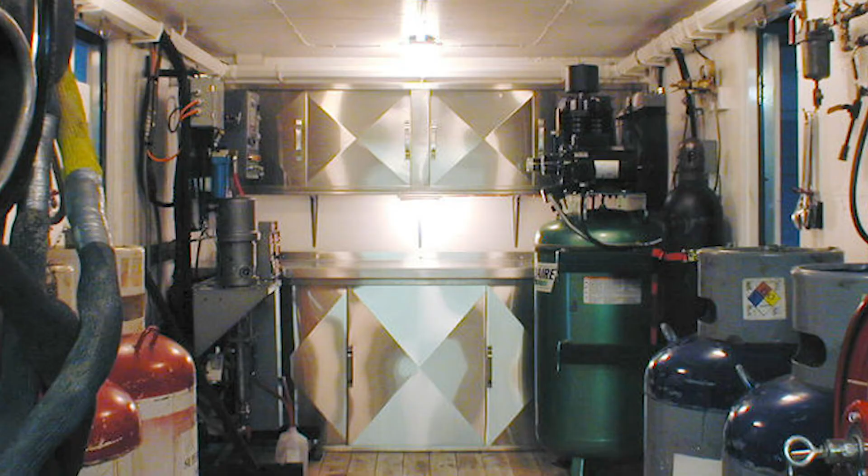The thing that is special about spray foam is that it is almost certainly the only building product that is entirely manufactured on site. And the chemistry is both elegant and complex. There are a lot of things that need to go right and quite a bit for the trained technician to master to get spray foam installation right. I recommend going with third-party certified companies, even knowing that these companies' installers will almost certainly never be the lowest bid. This spray foam truck looks more like a lab than a trade contractor vehicle. In fact, best practice spray foam rigs should be more like a lab.

The second special air sealing system is the AeroBarrier system. Now, to be clear, I am not recommending products here, but this is a unique and innovative approach to air sealing that you should be aware of. So here's how it works. Misting heads are located throughout the building, and the building is pressurized to 100 pascals, positive pressure with a blower door. The misting heads put very tiny droplets of a proprietary adhesive into the air. The particles are so tiny that they are suspended in the air. The positive pressure of the blower door means that these tiny particles get stuck as they move through all the air leak locations, building up until they seal off the leaks.

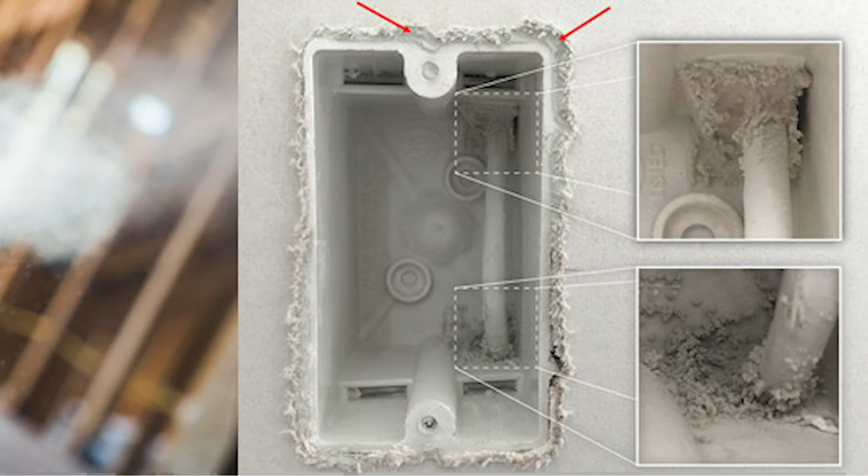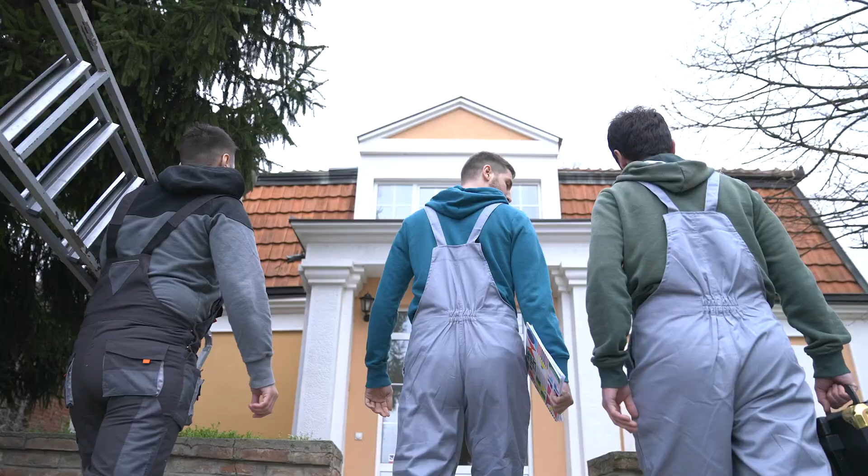This process can take a couple of hours, depending on just how airtight the building is to begin with, and just how airtight you want the home to be. You can basically dial in your desired airtightness with this system. Now, this system is very sophisticated, requiring proprietary equipment and materials and extensive training for the AeroBarrier installers. But the appeal of this system to meet the building code required 3 ACH or less is pretty obvious.

This last image is from a test panel where I and another building scientist are trying to assess the long-term durability of the AeroBarrier seal when through materials like PVC and copper pipe expand and contract over the course of seasons or even years. If we are going to rely on sticky stuff to seal our buildings, we need to be confident that they will last.

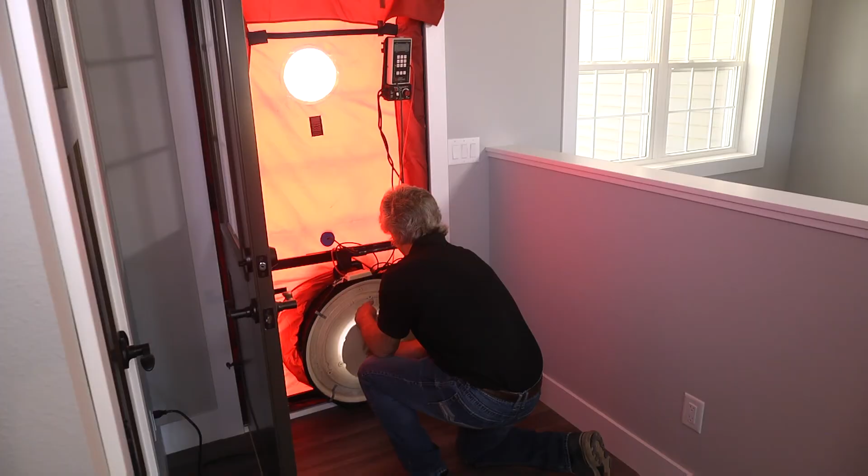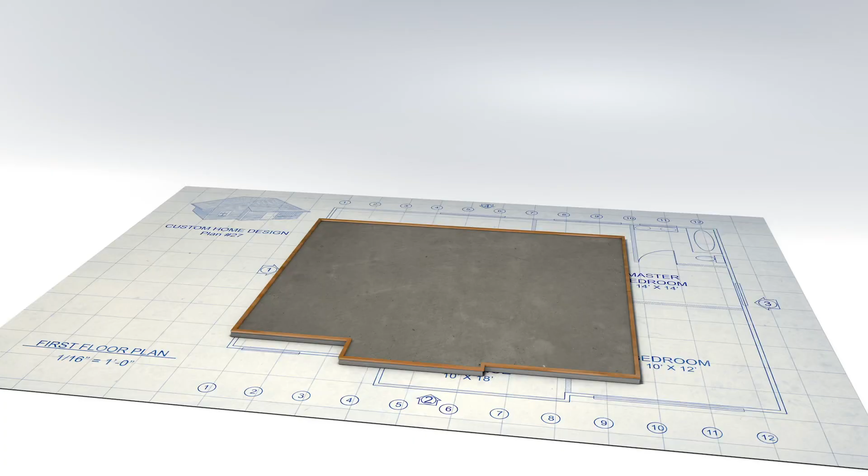So just a bit of an air sealing wrap up. Leaking air is double trouble. You pay for that conditioned air leaking out of your homes, or your customers do, and hidden moisture problems represent risk and potential liability. To get a continuous air control layer, start with the right materials and then connect them. The 2018 code makes air sealing mandatory, including performance testing. We depend quite a bit on sticky stuff to seal our buildings. Make sure that you use each one in the way it is intended. There are lots of ways to get an airtight home. The new code allows you to decide how to get there.

We hope we've shown you some real-world examples of the new code's focus on and the importance of moisture management, air sealing, and insulation. Join us for a deeper look at insulation and the 2018 code as we continue this series.